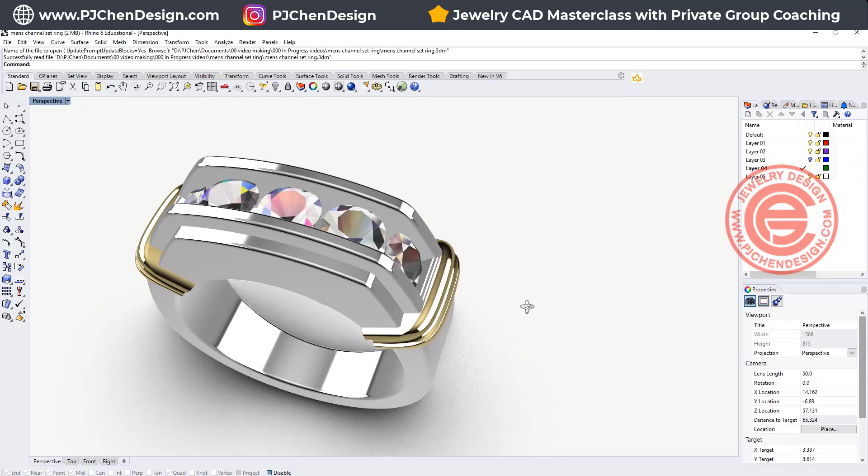Today I would like to show you how to use Rhino to make this two-tone channel set gentleman ring. Are you ready? Let's get started.

We are going to start by arranging the stone. This is a 5mm round stone.

Now I'm going to go to the front view and set up my ring size. I'm going to set it up like most of the demonstrations for 16mm, and you want to set it up for exactly your ring size. Then I'm going to move this one to the left, make a copy, and then tilt it and move it down. I suggest having the distance in between here roughly about 0.1 to 0.2mm, so you don't want the stones to be touching.

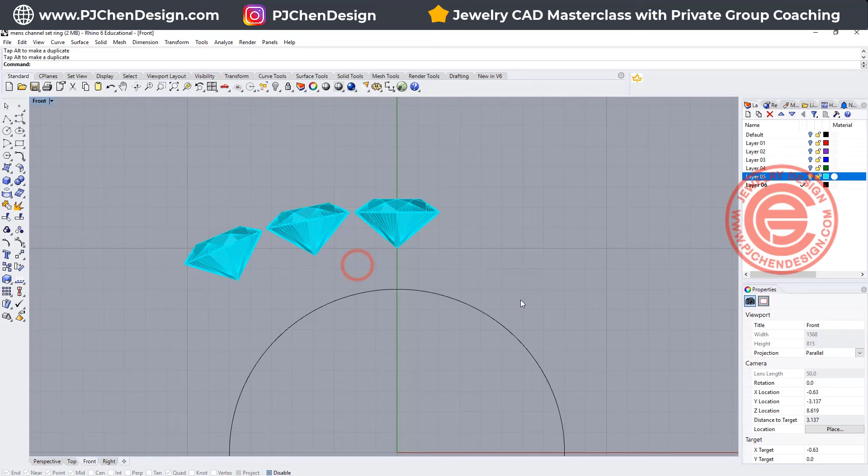And then you want to move another one to the side, and again this one needs to be tilted down a little bit more. Arrange the distance or however you like to have the stones arranged. And then we are going to use the mirror because it's going to be symmetrical, and I'm going to bring it up there. Alright, so I just tweak a little bit more for how I like them to be arranged.

The second thing I want to do is create the profile. So I'm going to come over to the front view and make sure I lock my grid snap. I want something like coming over here, and you want exactly the same number on the right side, and move it up a little bit. So this will be the curve we want to have. If you are going to cast it, make sure you have it over the table. It's because it's much easier if you have enough than not enough.

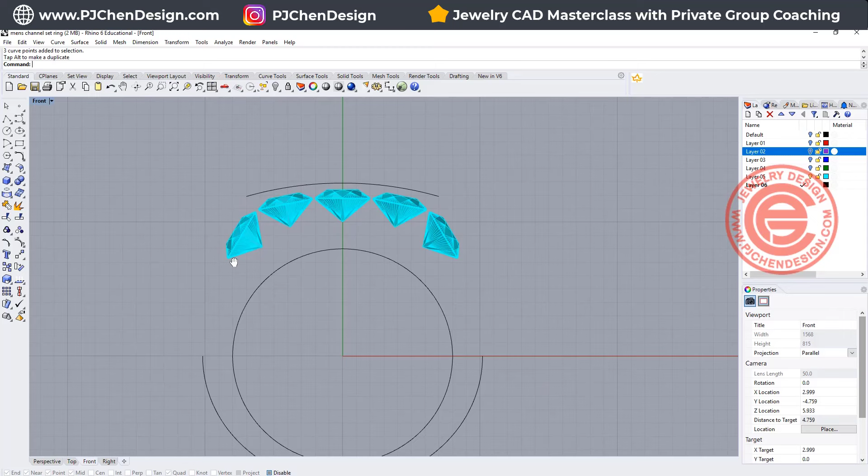Okay, and then I'm going to work on the bottom of the ring shank. Let's go ahead and use the arc, and we can set it up for however thick you want. Holding your shift, you will draw this half round. I usually like to have the bottom of a ring shank tapered down a little bit. It's just more graceful.

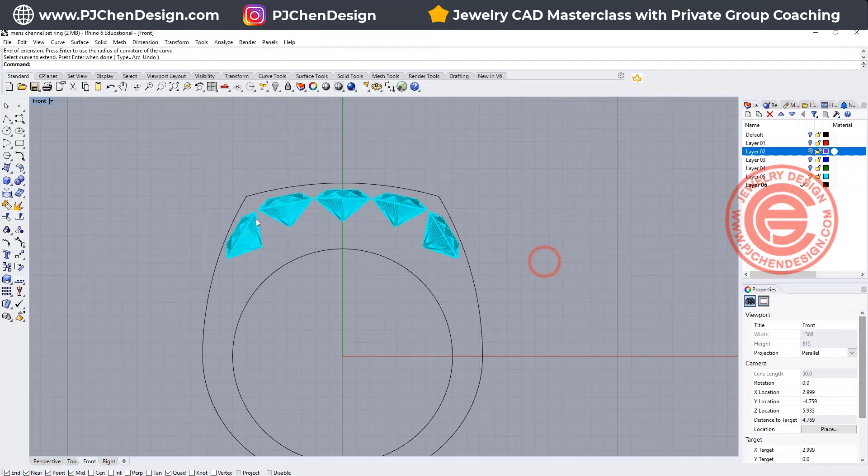After that, I'm going to use the curve. You have extend curve, from the arc to the point, and you want to go from here to here, and make sure that your osnap is on, and you also want to go from this point to this point. Alright, and then you can now reposition your stone if you like the curve better than where your stone is sitting, but I'm going to stay with whatever I have right now.

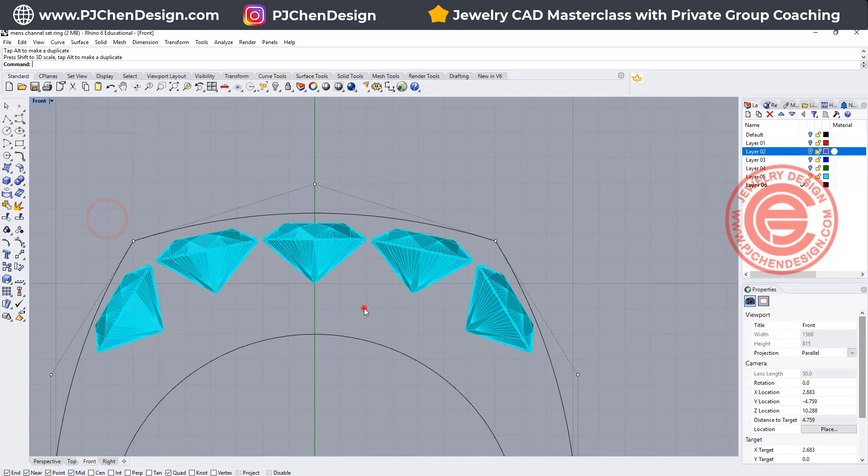Then we can go ahead and join it. You can still turn on the control points if you'd like it to get a little bit closer, and we might want to go like this, or we might want to go, you know, coming out a little bit. You can still tweak it if you want to. Alright, so now I have this. I actually like to give a small fillet, maybe just one, and go from here to here and here to here. So it's just much smoother instead of a sharp angle.

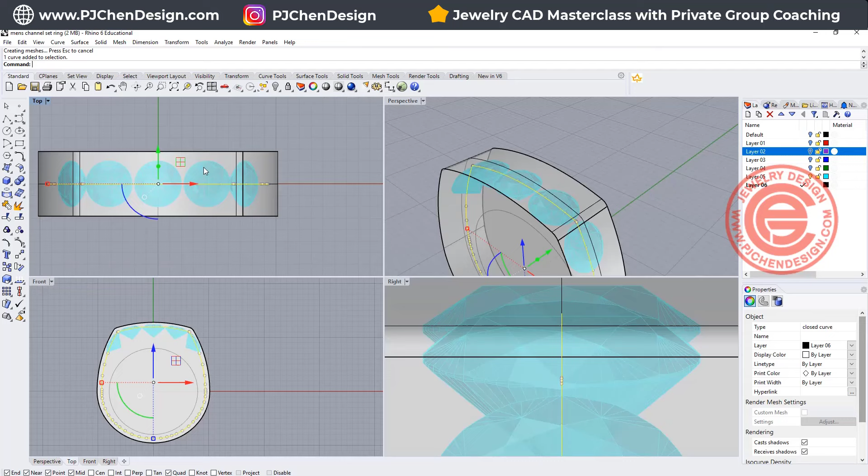I'm going to pick up this one and offset it because the second one outside will be a little bit smaller. Alright, so now we have this. The first curve that I have, I'm going to use Solid, Extrude Planar Curve, Straight, and I want to make sure it's on both sides, and I want to make sure it is over my stone for whatever thickness I'm going to have.

The second one, I'm going to do exactly the same, but this one you want to stick out just a little bit, and depending on how thick you want it, you can do whichever works for you. Okay, so then I will have something like this. I need to cut where the stone seat is open, so I'm going to draw a straight line, snapping into the 0, and I want to come over roughly like this.

And now because this is symmetrical, I want to mirror it to the other side, something like this. Let me hide this so you know what I'm doing here for my curve. So basically I need to make a cutter, and the cutter needs to cut out the space inside, and I want to make an arc from this point to this point.

And then I also wanted to keep some distance on the bottom, so I'm going to use the offset, and set it up maybe 1.3 millimeters from the bottom, so the structure will be really solid on the bottom to sit on your finger.

And then I'm going to use the trim command to trim the extra that I don't need. So this is this, and make sure you join them. Now with this one, turn it back to whatever I have there, and I'm going to use the Extrude Curve straight.

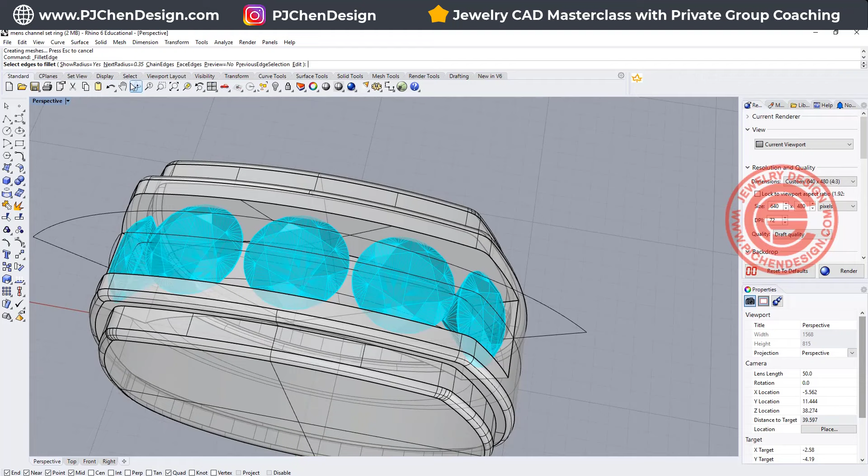So I'm going to try the other side, and they look alright. Let's double check it's a closed solid polysurface. And if that is looking good, I'm also going to work on here.

Inside I might want to do it just a little bit smaller, maybe 0.2. It's fine, and we are going to continue here, coming back on these edges as well for a 0.2 fillet. Alright, double check if it's still a closed solid polysurface.

Okay, so once we have that, we are going to cut it out inside of a ring shank. So let's go with the solid, extrude it straight, make sure it's on both sides, and we can use boolean difference, this one out of this one.

Okay, so now we have the ring. I don't really particularly like the pattern going all the way to the bottom. I actually want to have a solid piece, but we can address that later.

Let's go ahead and make that two-tone piece over here. So for that piece, I'm going to make it on the side. Let's go ahead and use the conic corner from the rectangle, and I want to start from the center, just snapping over here.

And I want this piece a little bit bigger than the ring shank that I have, so I'm going to make it longer than the width, and coming back a little bit to make it a little bit rounder. So once I have that, I'm going to use the gumball, holding my shift and tap the Alt key to make a copy. So then I have something like this.

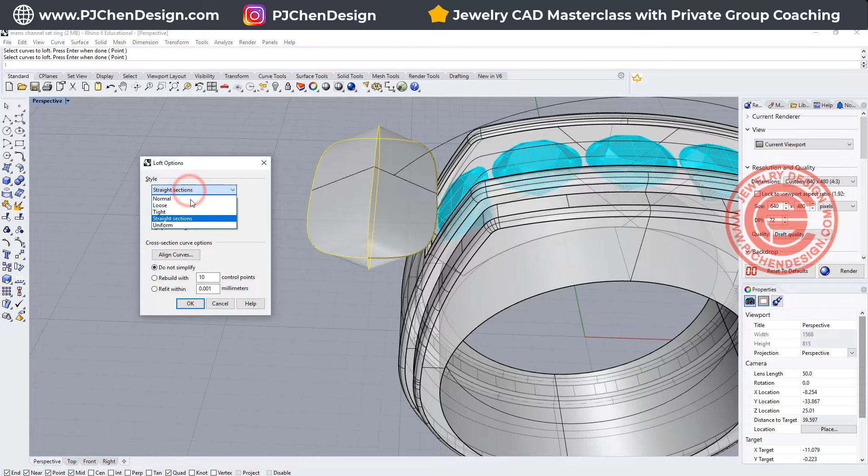You can choose to be normal, to be tight, or you can choose to be straight, or choose to be loose. So up to you, whatever that you like to do. Then I will have a very smooth piece over there.

If this is getting really puffy for you, and you don't actually have too much control, this is too oval looking, you have other ways to do it. So let's give it a try.

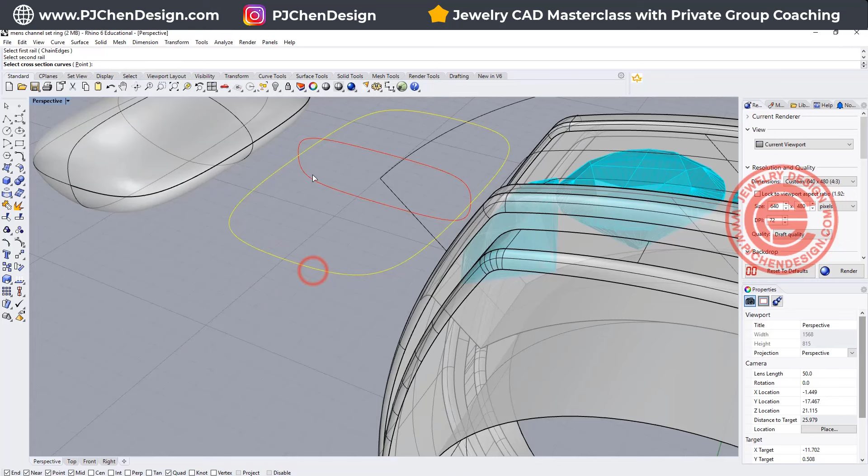I'm going to join this piece together, and I'm going to come over here. I have a transform, orient 2 points, and I want to orient it from this to here. Make sure that we can make a copy, and we do want to scale 3D, and then we're going to go from here to here. Alright, so let me hide this one first so it's not confusing you.

Another way that we can do is use the sweep tool. So you got rail 1, rail 2, and you go from this point to this cross section and into this point again, and you will get this piece. Notice that they are similar curves, but they can have completely different results like that.

Another thing that we can play with is I'm going to split with this guy. So then I have this curve here, this curve here, this curve.

There, and we can play with another way. It's called curve network. So you got 1, 2, 3, 4 in the same direction, and this one in the other direction, so we'll get this one. You can see the same curve or similar curve can create 3 different things over there.

So I'm going to use this guy, just need to make it a little bit puffier. Let me hide the rest of them here. Moving this one back to close to our ring, and I'm going to position here and turning into an angle, depends on how much you want them to stick it out. I may want this sitting somewhere like this. Let's take a look on the render view and see if that looks fine for us.

I also like to have a design with some sort of a groove in the middle. So we're gonna come back into our ghost view. I basically wanted to extract the ISO curve on this surface, and I simply just want to snap in somewhere close to here and somewhere close to here. Alright, so now I have this curve.

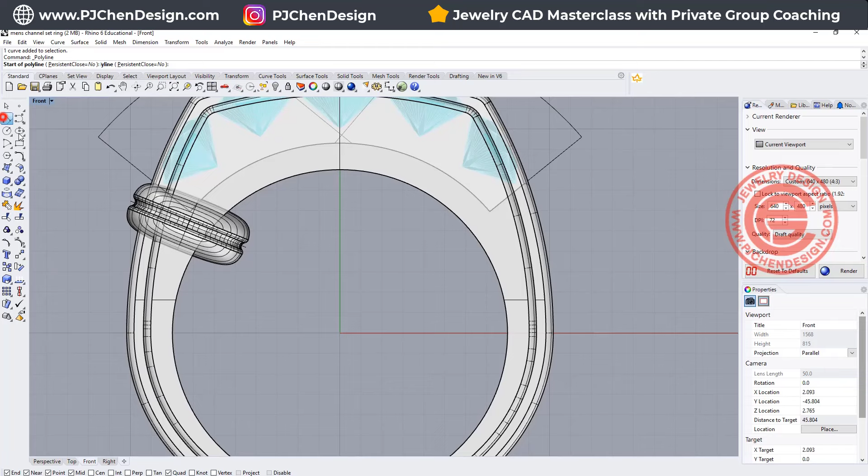Okay, so now that's dealing with the bottom of the ring shank. I really don't like this ring shank over there to continue to the bottom, so I would like to trim off the bottom of the ring shank. So let me draw a line. Simply whatever is inside of that two-tone piece there, that will be fine.

And we are going to mirror to the other side, having those two to trim. Then I'm going to create another cross section there, and I'm gonna use a rectangle with the corner that stay with the center, snapping center into anywhere there. I wanted this ring shank just slightly thinner than that two-tone piece, coming more like this shape over here.

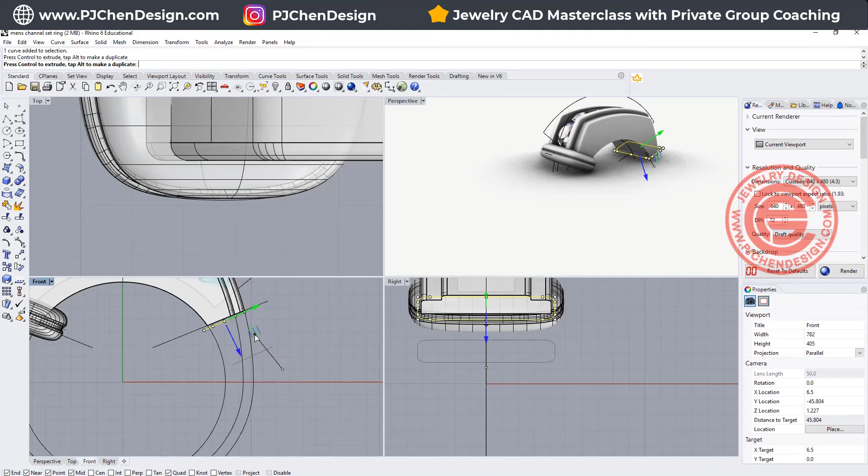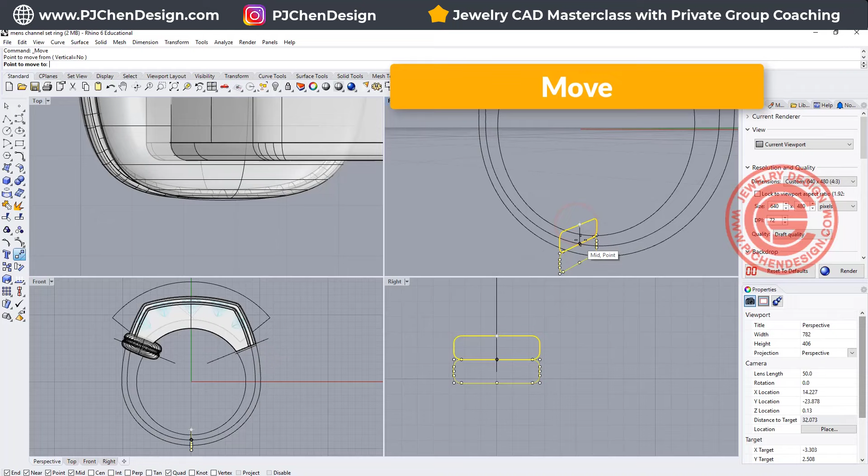Next thing we wanted to do is kind of tilt it in the same angle as the cut that we have and bring it over here. I also want to make another one, again snapping into the center, and I would like to have right here, depends on how tapered you want it on the bottom, and coming back like this.

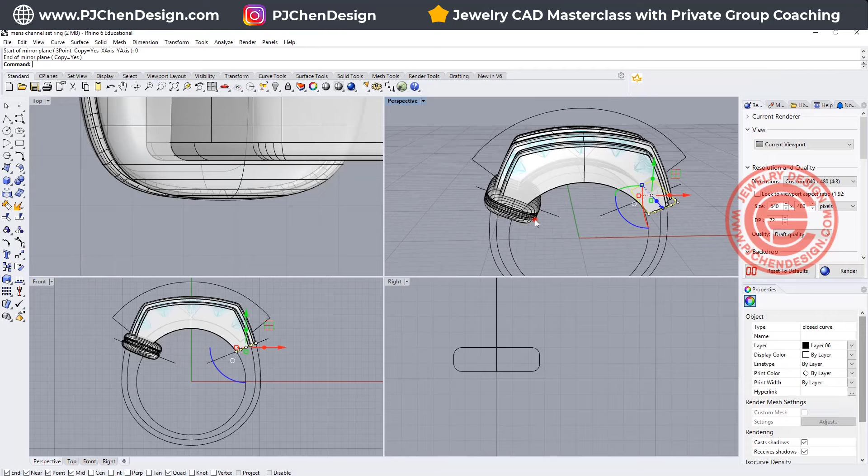Okay, so now for the bottom one, we want to move it into the right place as well. So let me move it here to here, and again moving this midpoint to this midpoint here. If that appears to be too tall, we can move it down a little bit, something like this. Okay, so everything is fine. Now let's go ahead to mirror that to the other side, and then we'll have something like this.

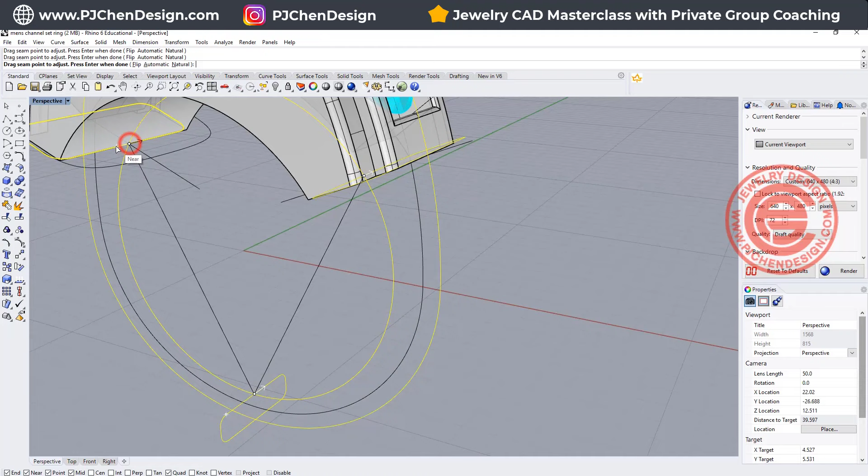Let me hide this one so we can see that curve - this one, and this one in red color. Okay, so we're gonna use the command sweep 2 rail. This is your rail 1, rail 2, cross section 1, 2, and 3. Moving all my arrow to inside of the ring shank, making sure they are facing the same direction. So like this one needs to be flipped, and then we'll get something like this.

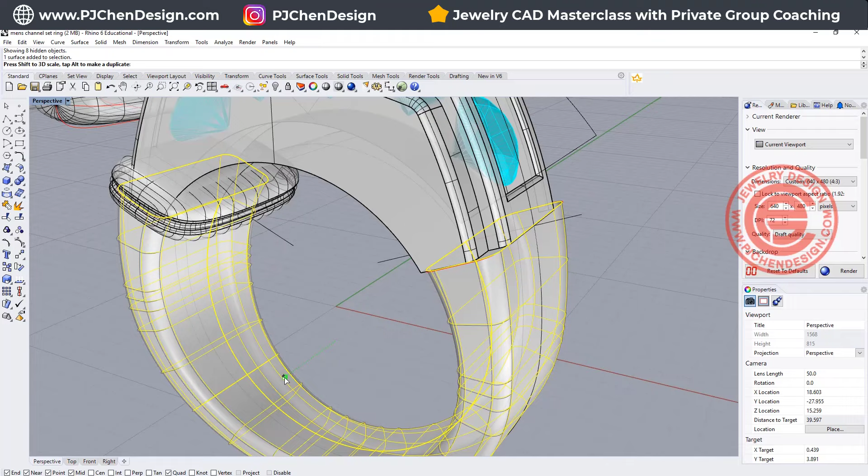If you don't like that curve there, you can click on maintain height, so it will come straight down. That's turning back to the piece over there. It looked like the bottom is a little bit too thick. I simply just want to 1D scale down for something like that. Okay, and if that looks nice, let's go ahead to mirror that two-tone piece to the other side.

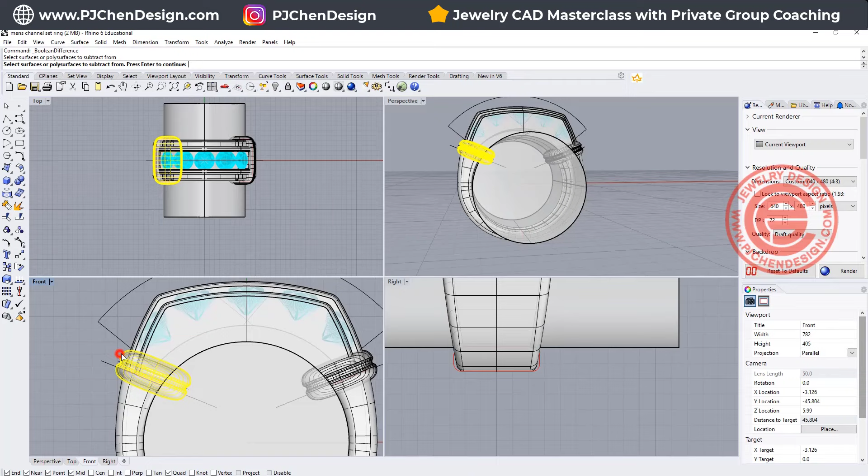So now let's go ahead to use the solid extrude straight again for inside of the ring shank. This time we want to trim it off, this guy and this guy out of this one. Double check with the render view and see if everything worked the way that you wanted to have.